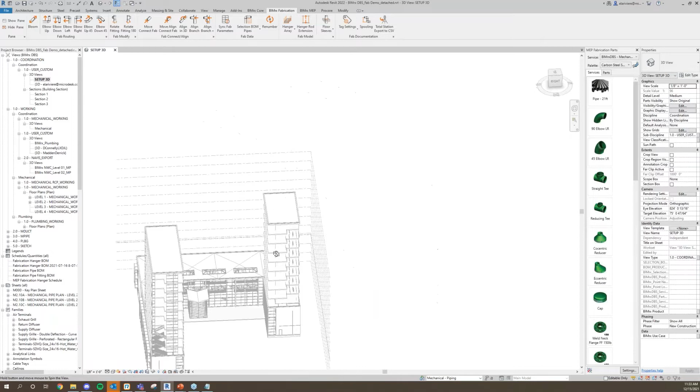All right. So my architect has just sent me a slightly updated model. That new model has come in, and I've got two whole towers sitting here that I didn't have before. I've already got some floor plans set up. I've got my first floor, 4 levels all good to go. But I really need to get my towers set up as well.

So BIMrx Core supplements this workflow pretty amazingly. I'm actually going to set up an entire set of views for this tower in about 3 minutes, something that is an insane amount of time to get done in.

So I'm going to jump up here and start first with the Scope Box Manager. Scope Box Manager is allowing us to not redo work. We're able to jump into the architect's model, find that they've already created tower scope boxes, and I can actually just bring those tower scope boxes directly into my project. So you'll see them sitting here both in green. I can click close, and we'll see those both show up. There it is, I can grab it.

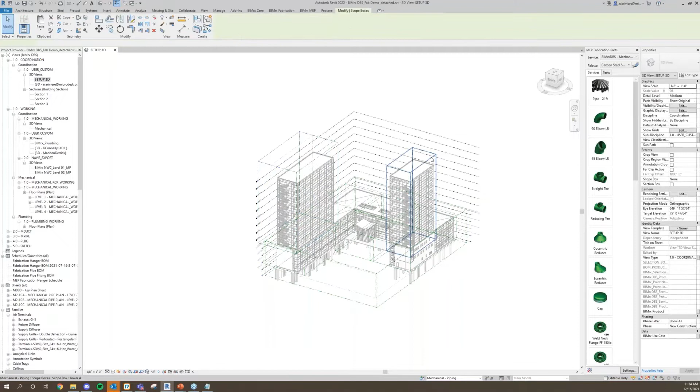Now, if something gets resized, maybe the architect has resized it, or maybe we've got an intern who accidentally dragged one of these things over, and we're not in alignment anymore. We're not up to date. We can jump straight back into that manager, and it actually remembers the link between these models. So if I tell it about the ARC model again, we'll see that these have moved. We are out of date.

We need to do something about these. So I can grab those two over on the right. I can update them, and we'll see that these move straight back to where they're supposed to be.

So once I've brought my scope boxes in, I really want to start getting my actual views set up. I'm going to do more than just views. We're going to do views and sheets. We're going to get this whole thing ready to go for an SD set.

So jumping in immediately, I'm going to go ahead and use the power of Excel to just make all this stuff move quickly. So I'm going to go in here and I'm going to load my configuration settings, something that I can generally take from project to project. I have those stashed in a folder over here. I'm going to go find my folder.

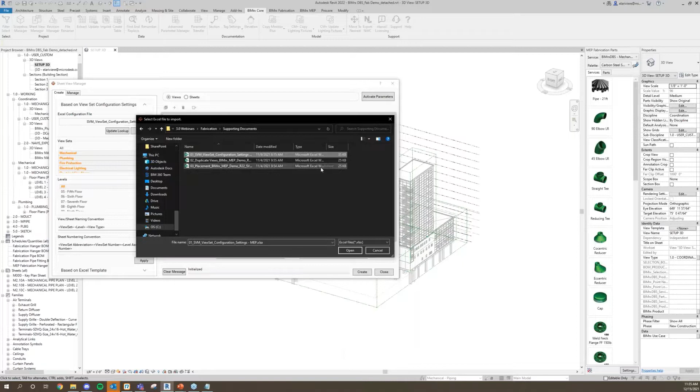I'm going to open up my standard configuration settings. That's going to load me in here. We'll see I'm doing mechanical, plumbing, and electrical power. I want to work on these files over here, 5th through 12th floors.

If I click apply, we'll see that this whole menu fills out, giving me abbreviations, view names, telling me what type of plan I'm going to be creating, calling out the levels they're associated with, templates we're going to be using, everything we need to set up that sheet.

So once I've filled this out for views, I can go ahead and click create, and we'll watch it generate 24 views in about 2 seconds. An incredibly fast amount of time to get those done.

I want you to think about doing this manually, right-clicking and duplicating and renaming, or going up to the View tab, going to Plan Views and creating each one individually. It's an incredibly time-consuming task.

Now, I created those views in 2 seconds. I can jump straight to Sheets and create an associated set of sheets in maybe 4 seconds, 5 seconds. Oh, not even 3. So very, very quick to create those original views and those original sheets.

But really, that's not all we want to do. We don't want to just create those views and sheets. We want to do more.

I've got 2 whole towers. Realistically, I want an A and a B view for each of those. I can jump straight in here, load in a duplicating view setting box, load that guy right in.

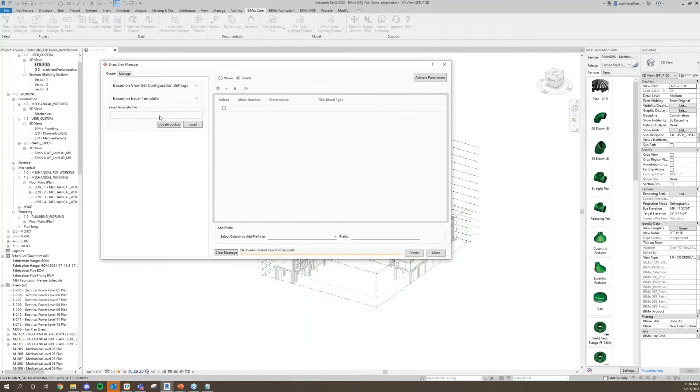I'm going to jump straight back from sheets to views here. And we'll see that I'm able to call out now that I'm using each of those 5th floor plans to generate a tower A and a tower B plan, and also linking each of those to my tower A and tower B scope boxes. So looking through here, I'm doing this for mechanical, plumbing, and electrical all at the same time.

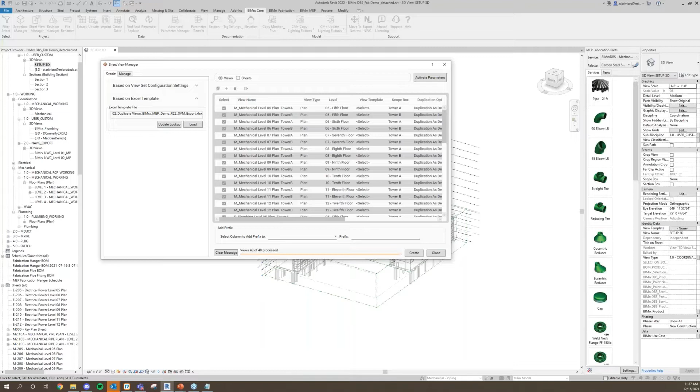I'm going to click create, and we're going to see 48 separate duplicate as dependent views created in about under 6 seconds. I'm going to close out of here just so we can take a look at these.

If we go take a look inside the HVAC folder here, floor plans, there we go. There it is, level 5 through 12, and if we open one of these up, we'll see that they're even being named Tower A and Tower B.

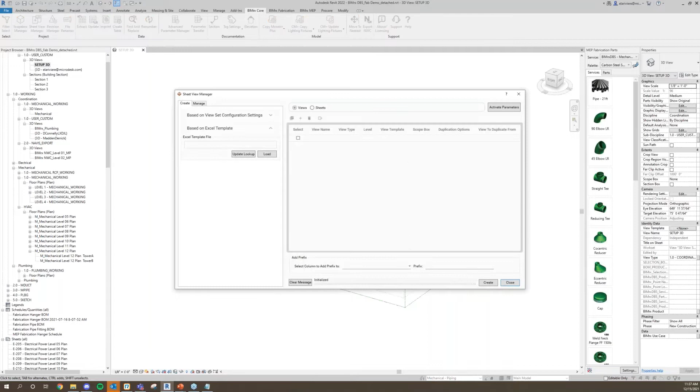An incredibly powerful workflow gets this project set up almost immediately. But wait, there's more. I can jump straight back in here and I can actually place these views on the sheets as well. I'm not just creating it, I am setting it up.

So I'm jumping in here, I'm going to load, and I'm going to grab that placement as well. Once that's been brought in here, we'll see that it's actually calling out each plan that we're working with, each view I want to use, and a location for each to be placed.

We're given these top right and middle right, so we should expect to see these on the upper right and middle right corner of each of those sheets.

I'm going to click create and keep talking while it does this. So if you look at the bottom, it is processing. This is maybe the most lengthy step in the entire process. It takes maybe a little bit under a minute to run.

But again, I'd like you to think of what the manual version of this exact same process would be. We're opening up each individual sheet. We are dragging and dropping a view from our project browser to each of those sheets. In fact, we're dragging and dropping 2 views.

Once we've dragged and dropped all the views and placed them, they're likely not even going to be in the same spot from sheet to sheet. It's really easy to make it look like multiple companies are making multiple different trades.

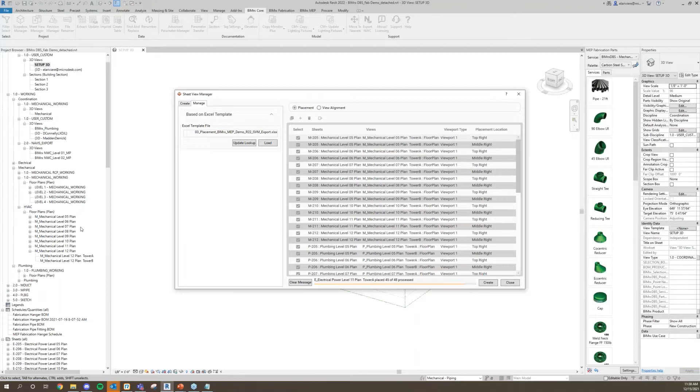Using a command or suite of features like this, we can make every single trade, every single sheet, every single level look the exact same and issue an incredibly, incredibly consistent set.

So if I close out of here, you may have noticed views showing up on each of those sheets as we went. I'm just going to pop open a mechanical level 10 plan, and let's take a look at what we actually got here.

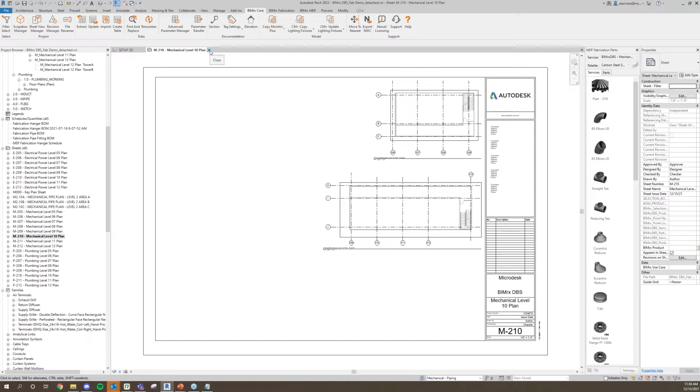Right, there's those 2 views, sandwiched to the right, all lined up. It's 11:39, and under 5 minutes, we have set up 12 floors of a project. That is crazy, crazy fast, right?

So very easy to do, works in giant projects, works in small projects, wherever you want to do. And we can reuse those files from project to project to make sure that we're not wasting time.

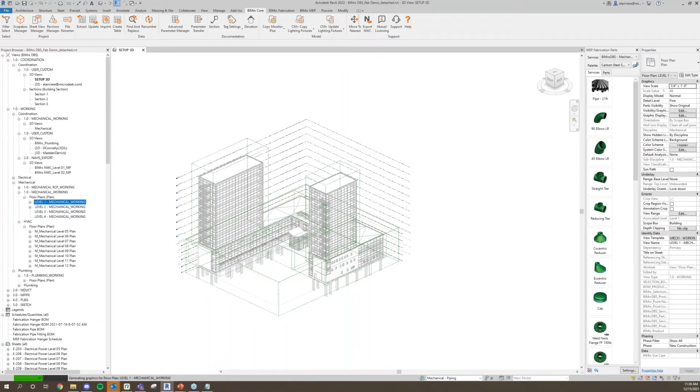So once we've got a project set up, we've got some space, some areas in here, we probably need to go and start filling out our model and actually doing some of that modeling. So I'm going to go ahead and jump into one of these mechanical working plans, and I'm going to do some stuff down here. I'm going to get rid of that setup view and start working.

The ability to work in 3D. In fact, I almost exclusively work in 3D at this point.

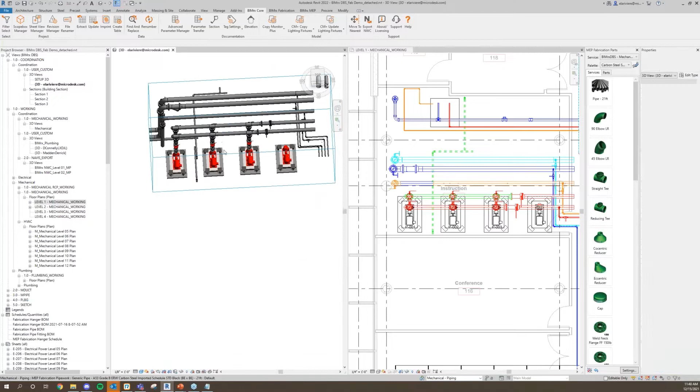So using that window tile to open these two things up, I'm going to go ahead and, I've got this pump sitting over here. It's already got a flange kicking off of it. And maybe I want to bring the rest of that header into this place. I want to get all this stuff copied over and connected.

Typically we're cutting a bunch of section views, moving a bunch of stuff around. Well, boo-hoo to all that. I want to work in 3D. I want to leverage the power of these tools to do this.

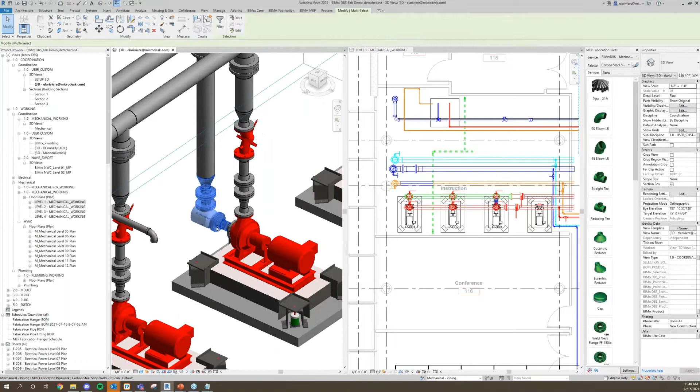Copying in 3D, probably not something you're used to doing because it doesn't tend to work. Nothing lines up, impossible to connect, impossible to get it all to move together.

Well, I can jump right up here and I can start using these move connect commands to start bringing these together. So if you take a look at this move connect fab, I can go ahead and grab that flange that's sitting over here, grab this element here, and we'll see it aligns, brings it over, and moves them together. If I hit tab through that piece of equipment, we'll notice these things are all connected together.

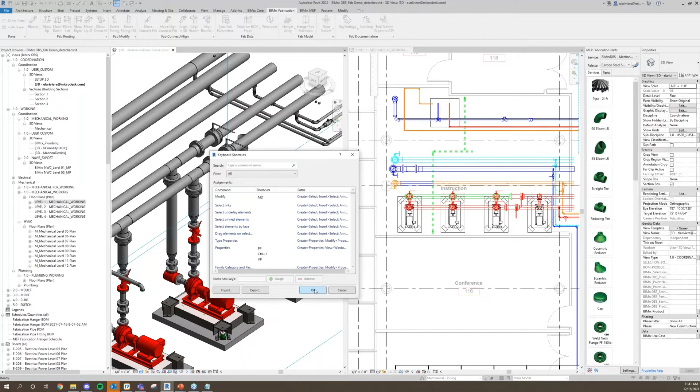A really, really cool thing we can do. You can actually go in and you can have your keyboard shortcuts loaded in here. So I can have fabrication keyboard shortcuts loaded specifically for every single one of the commands I have across the top. So we'll see elbow up is EE.

That move connect that I just did, I can go ahead and line up with an MC as well. Very, very quick to bring these together.

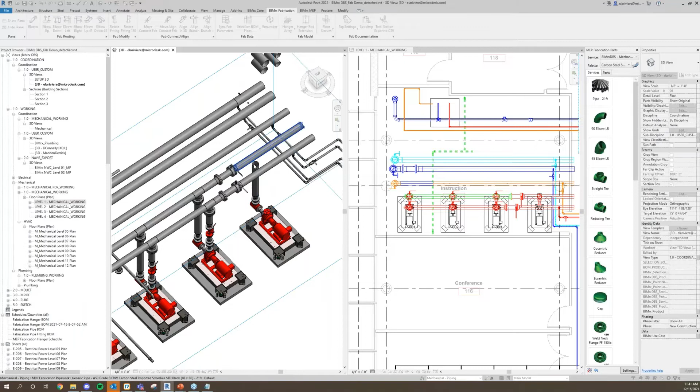Once I've connected those together, once those are lined up, I need to make sure my vertical is lined up for my header. I can use the align branch command to choose my header, choose my vertical, and it'll slightly move it to make sure these are a perfect connection.

So I can then use the trim extend command that's built into Revit to bring these two elements together. It's an incredibly fast process to start getting these elements connected. It works really, really well.

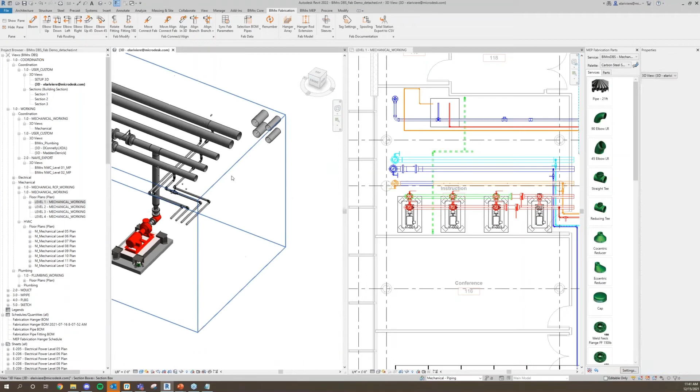Now, I might just not want to be connecting some stuff together. Maybe I want to actually build in 3D. Maybe I want to work with a whole bunch of these pipes that are sticking out of the corner. And if you take a look over here a little bit, we'll see another extra one there.

Now, connecting these is pretty easy if they're all on the same plane. I can use trim to corner to bring anything that's on the same level back together. Easy enough to connect these, easy enough to connect these.

These two here, linking up to that second tier, maybe not so easy. That's probably not going to work so well. In fact, I probably want to leave this middle one here open and maybe connect the other two instead. Give myself the correct amount of space to make these connections.

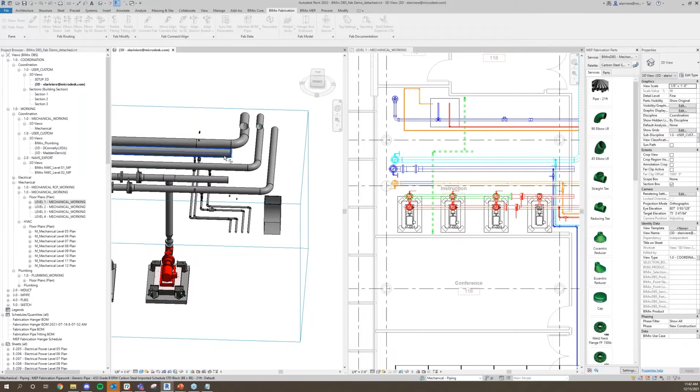So real quick again here. We're connecting across there. We're connecting across here. These two need to make it up to the second tier. Well, I can do some of this stuff incredibly, incredibly fast.

I can go ahead and use an elbow over. So maybe I'm using elbow right to drop down an elbow here. If I get the wrong direction, it's as simple as an undo and do an elbow left instead.

So once I drop those elbows down, I'm going to be able to delete those little extensions off the end of them. I'm going to grab those two extensions. We can remove that extension.

I can go ahead and look at both of these fittings, and I can use the rotate fitting command to select that fitting. I can bring this up 45 degrees. Again, if you hit the wrong direction, it's as simple as undoing, doing the same command again, and then doing it in a negative 45 degrees.

Run that on the same element over here, rotate fitting, thus in negative 45 degrees. I'm going to go ahead and bloom both of these elements out and give myself an extension.

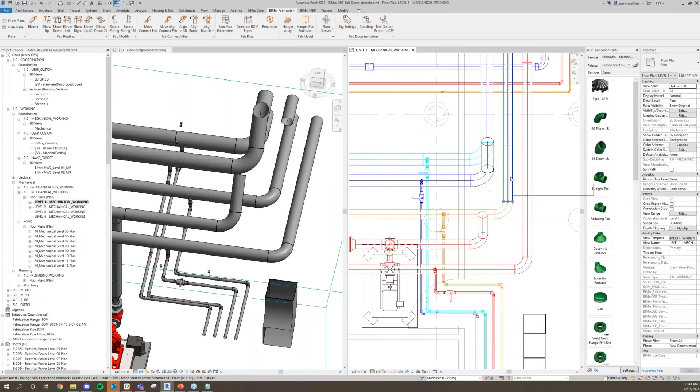I can start mixing 2D and 3D workflows together at this point. We take a look down here, I see that little extension up and I see the horizontal over here. I can use my align command over here to bring these together. Use my align command over here to bring these together.

Now that I know these items are lined up, we want to start bringing them together and actually getting these things to connect, right? Well, I can use my elbow down at a 45 off of these two items over here. My mistake, wrong keyboard shortcuts. Drop those elbow 45s down over here, delete that little extension right here, and then we can use a move connect to make this extension line up and connect to that elbow.

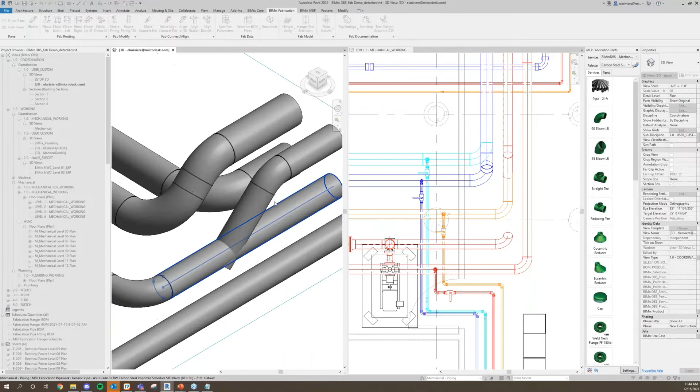So that same move connect fab, grabbing the elbow right here, grabbing that extension, and we'll see it move over, connect, and line up all together. Very easy, tab through, see everything's connected. That same move connect fab, elbow. Make sure you are clicking very intentionally. Maybe zoom in to make sure you're getting the element you want, and we'll see all those elements connect together nice and easy.

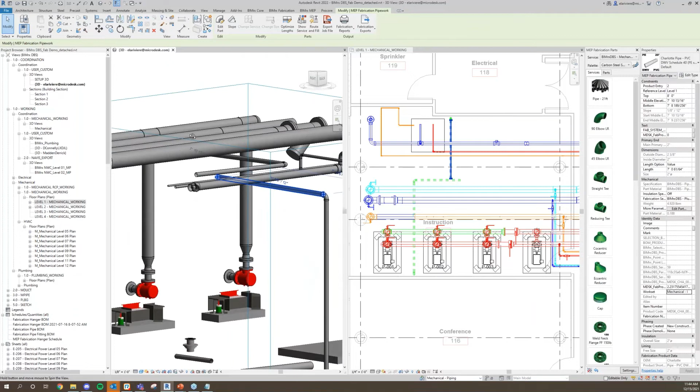Now, this doesn't only work on flat pipe, this also works on slope pipe. So jumping over here really quickly, let's take a look at a piece of slope pipe. If we see over here, we'll notice that there's a little piece of pipe coming up this way and kind of just lining up to go in. Now, those are not lined up to go flat, and I'm going to even show you an extra cool thing. What if I even had maybe a little run that's sitting here, and that last bit of the run doesn't even have a slope on the end of it? Well, we're going to take a look at two different situations, a no slope and a slope, and trying to get these to connect. Both of these are horrible situations to be in. Nothing ever wants to connect easily.

Well, we have these align branch commands to make all this just simple as heck. If I use this first align branch command on the main right here and the branch connecting to it, we'll see it shifts it up. It has maintained that slope. The slope is not changed over here. And I can use that trim extend to bring these items together. Not a single transition, not a single extra item being brought in.

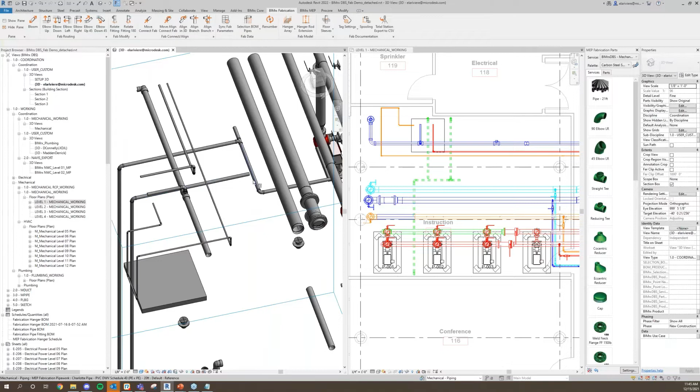Now, what if I have something that doesn't have a slope but is supposed to? Well, we actually have a fix for that. We have align branch plus. So choose your main, choose your item sloping into it, and it's going to go ahead and pass that slope directly into that element. So when I do that trim extend to bring these together, that will go ahead and connect here as well. Incredibly fast to work with that slope pipe. Very easy to work with that flat pipe. Elbows up and elbows down anytime you need them.

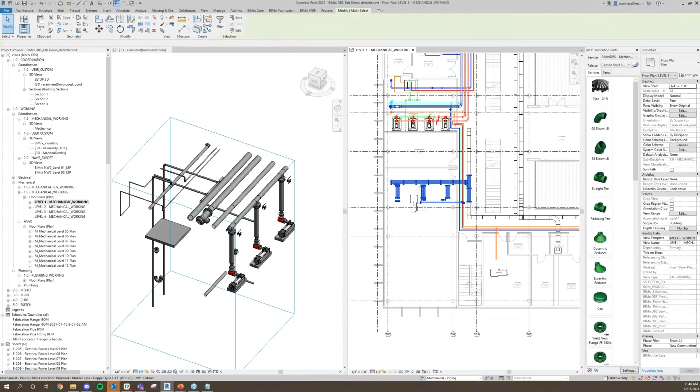Now, this stuff doesn't only work with pipework, it also works with ductwork. Let's take a real quick look at these elements down here. If I go ahead and open these up in 3D, we'll see that I have some ductwork floating around at different heights. I have some terminals that need to connect. It's just not really set up yet. Now I can use those align branch commands just like I was doing before to make sure that these are lining up at the correct height to make these connections. So again, using that align branch over here, we can line these items up. We can use those trim extends to bring these items together.

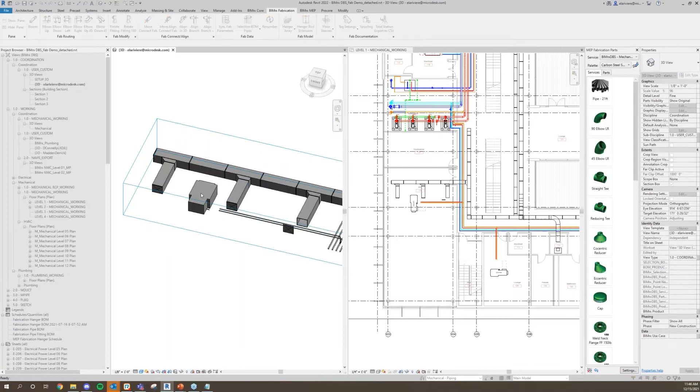And then if I want to use move connect to start connecting those air terminals, I can do that as well. So using that move connect over here, choosing that end piece, choosing the cap. Very quick to start placing these items together in 3D. So we've done some modeling. We've seen it on pipes. We've seen it on ductwork. Once we've done some of that modeling, it's really time to step into the second level, and that's getting some detailing in here. Now, what kind of detailing are we talking about? Well, we can very quickly add some sleeves in, whether it's wall or floor.

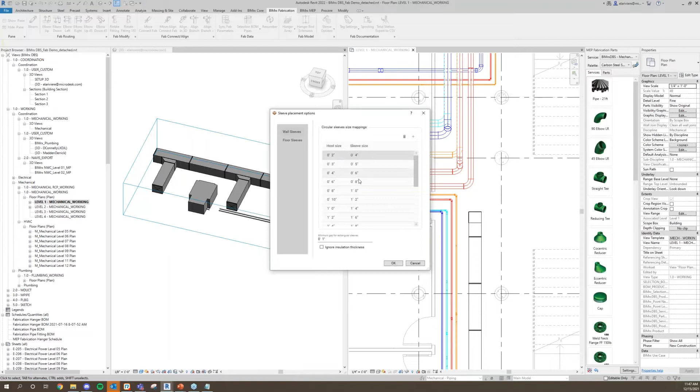And not only can we add them in, we can set up some options so that sleeves match whatever your shop typically works with. We'll notice we have host size and sleeve size, auto-generating that sleeve size based on the elements you select. Those sleeves, as we look at them, will compare against our linked-in background to come up with the correct size. So if I go ahead and I do a wall sleeve across those pipes we are already working with, and I click finish, we'll see that it's going to automatically generate a sleeve the width of that wall for each of these elements.

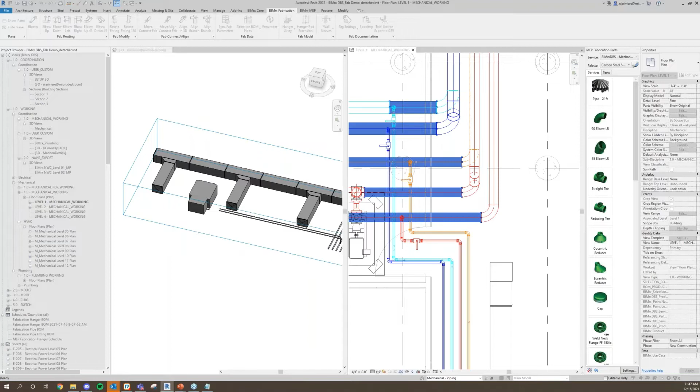Now, an extra cool thing about those sleeves, these come with nested points inside of them. We'll see in a little bit that there's an entire set of point workflows we can do that export out to total station with no problem. We'll get a little bit more into that when we take a look at the hangers. So these sleeves are being generated. We see them placed across all of them. There they are. If we want to go take a look in 3D, there are those sleeves in 3D for each of those elements. Very, very quick to place, works on walls, works on floors.

Now, there's a little bit more detailing we need to do than just placing sleeves. We probably got to work with hangers as well. So let's take a look at how we can maybe make hangers a bit easier to work with. So for our hanger commands, we actually have the ability to set up a configuration. So that configuration says based on size, based on service, what hangers do we want to use? We'll notice for ductwork, I'm saying in any size, I don't care, I want to use trapezes, and then I've got a few settings for my spacing.

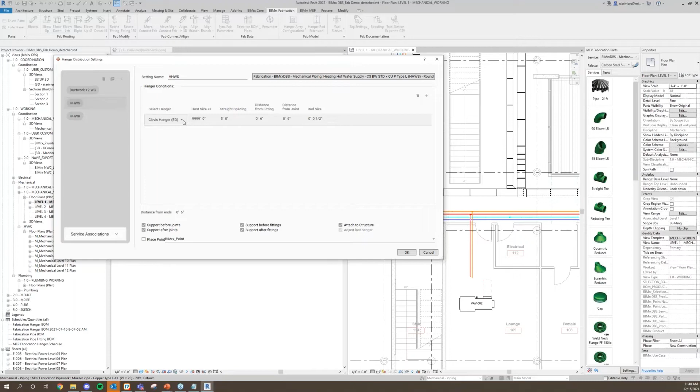I've also specified for hot water supply and hot water return, I want to use clevis hangers. If we want to add more, you can absolutely add more rows. Use the host size to determine what size gets what hanger. These hangers we see are all the fabrication hangers that we would have coming from your services. So once I've gone through and specified what I want these to be, I can use that array command, and I can just select elements and it will place them on those elements. So here I am, select a group of elements, click finish.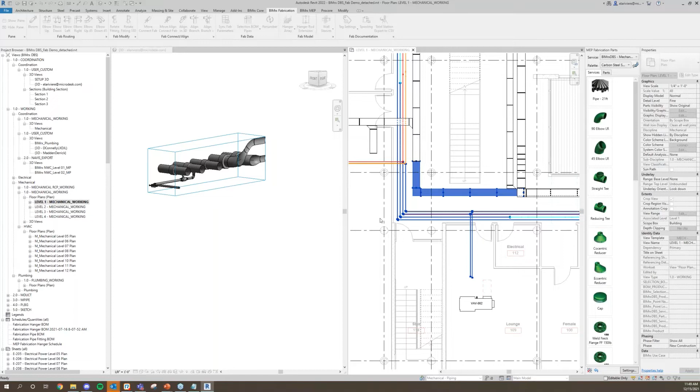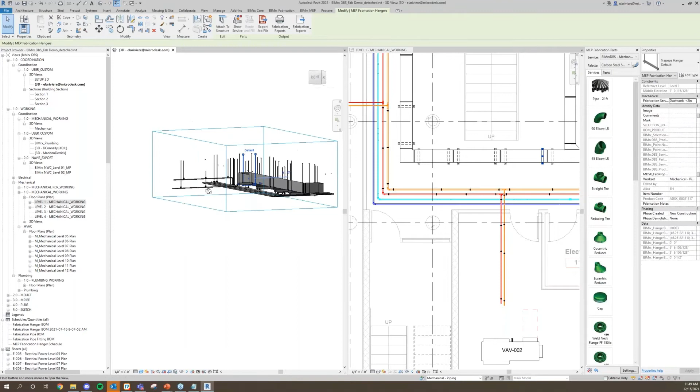You'll notice it's not going to place it on the cold water, so I have not specified a configuration for the cold water, but it's going to go ahead and place them on everything else. So there's those hangers sitting on the pipe, there's those hangers sitting on the ductwork. Let's go ahead and take a look at some of these elements in 3D. Now, there are a couple settings that I chose inside that hanger configuration. I asked it to please extend each hanger until it hits a piece of structure. So if I very quickly toggle on my architectural model, we'll notice that these have extended up right to the point where they intersect with a piece of architecture.

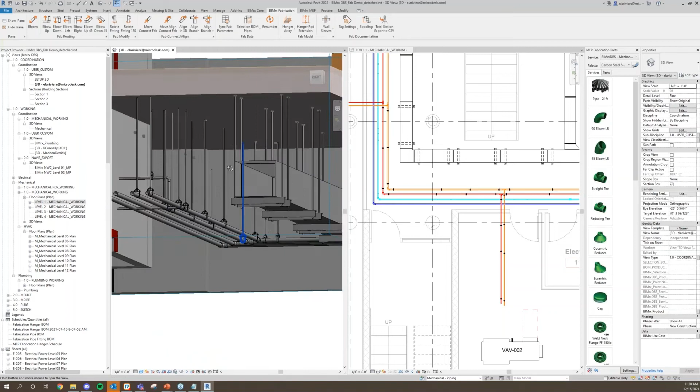I'd also like you to notice that I set the hangers to automatically place points at that endpoint there, right? That's a setting we have in the configuration file. So it's actually dropped those points at the exact endpoint of each of those hangers. I have that setting turned off for pipework. You'll notice over here I did not place those points for pipework. The reason currently being, those points, once they're placed, that's where they'll be. If your hanger moves, you'll need to delete the points and then use the command hanger points placement to get them back. The recommended workflow right now is to place your hangers and get them located.

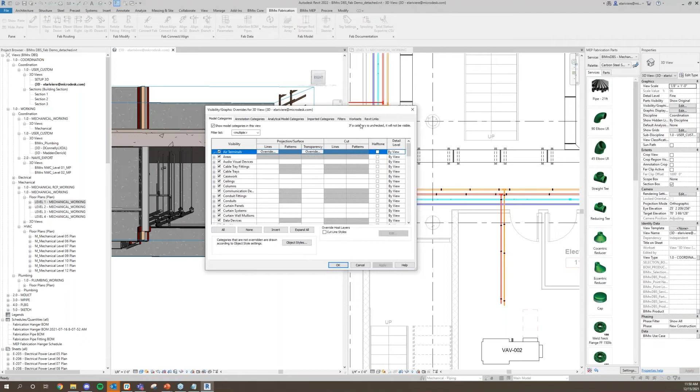Once you're happy with where they sit, you can then go back afterwards and place those points because it is incredibly quick to place those points. All I need to do is say, hey, here's some hangers without points. Let me use my hanger points placement. Select those elements, click finish, and it will generate those points for me.

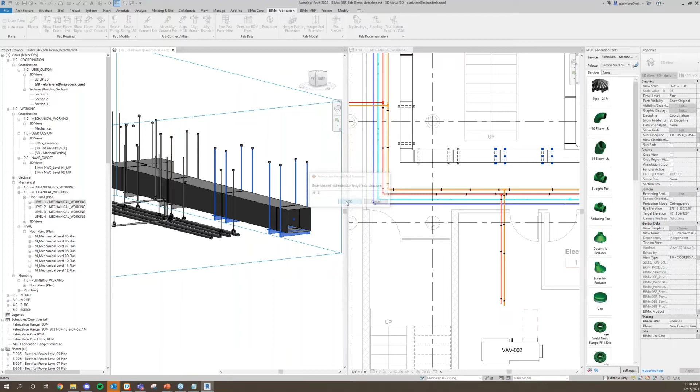We also have the ability to do a hanger rod extension. That extension will allow us to kick some of these hangers a little bit further into the steel so we can own that extra space. So maybe I want these to go 2 inches further into the steel. I can do that immediately. Just to note, the points will remain exactly where they were. The points will not move.

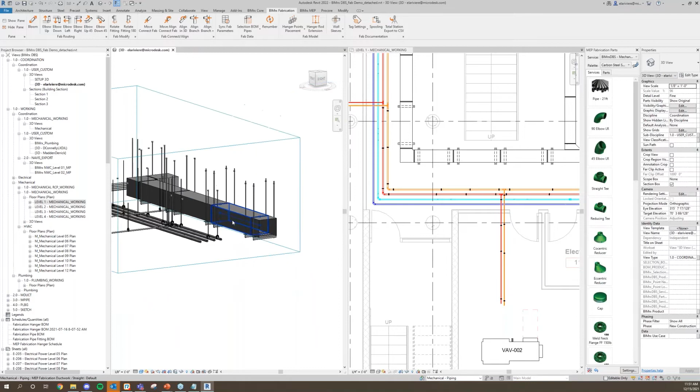Recommend placing your points down so they're on the outside of the structure, then extending into it, so when you go ahead and use your laser in the field, it's hitting the correct spot. So placing those hanger points, very easy. Placing those hangers themselves, very easy. So we've gone through, we've done some of that extra level of information there. We've got those hangers placed.

Maybe I want to export those out to total station. All I need to do is choose the total station export, select some points, and it will just export that out directly to my desktop. I'm going to save it right there. If I want to go grab those files from my desktop, we will see that total station export, and it's going to give me locations of each of those items that I just selected.

There we go, point numbers being called out and giving us a little bit of information about what that element is, right? Those hangers telling us exactly what style hanger it was. Very, very quick to export those out, and that will go straight into a total station service.

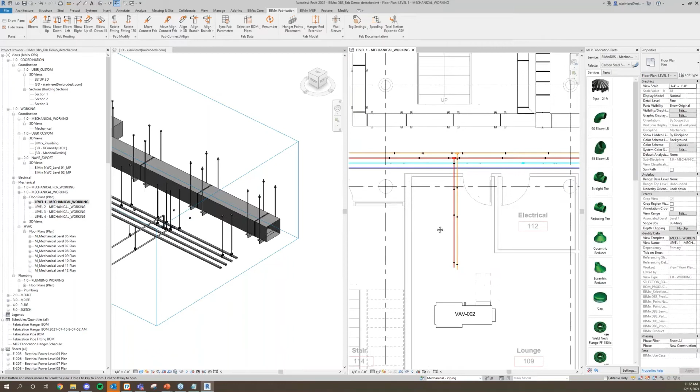Now, a really quick thing I'd like to show you that is also happening in the background, we do have access to some additional data you wouldn't normally get access to. I'm going to open up the show pane over here. Anytime we click a piece of fabrication equipment, we're actually getting those additional parameters we're not supposed to see showing up in our fabrication properties. And any of these properties that we see over here, we can actually link up to a standard Revit property by using the BIMrx Fabrication Database Sync. We'll see that right here, that sync fab parameters.

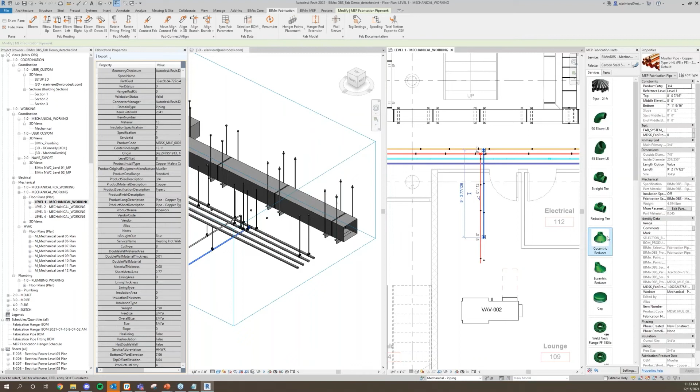We'll notice right now, I am calling out for the weight of each element I am working with. This is going to assist me in doing my point loads. I've pulled that up. It's a value that I can access in Revit, not just something I have to dig into the properties for. And we'll notice if I change the size of this element, and I'll click back on it, we will see that the weight may not have updated, but if I go and I reopen my sync fab parameters, all you need to do is open that up and it's going to go through and update any of those values for us. Right? Very, very quick to get those values in.

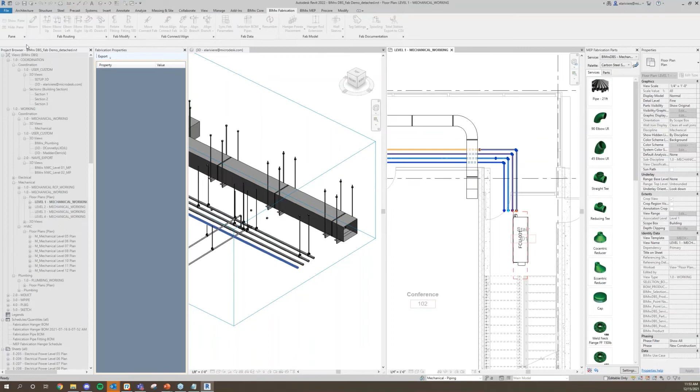Then the last thing I'd like to show you very quickly, maybe you've got someone on the field who is bugging you to start working in a certain area and you need to get them a really quick bill of materials. Well, I can go ahead and pop open a really quick bill of materials. If I want to do one for pipe, just get a small selection of elements you care about, click finish, and it's going to automatically generate those schedules for pipe and for pipe fittings.

Those will be dated and timed. Those are both sitting down here in my schedules. There's the one that I just created here on the 15th, and there is that pipe bill of materials coming out, giving me all that information. Very, very quick to get that extra data, very, very quick to give it to other people.

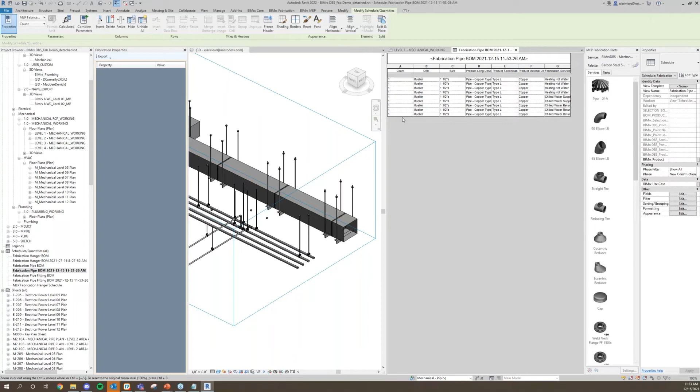Now, the last real step we have in detailing is generating some sort of a spool. So I'm going to jump back to my level 1 views here, and let's do this last spool step. So I'm going to go move over. I'm going to take a look at this area over here, and I'm going to spool the second header that I have sitting over here.

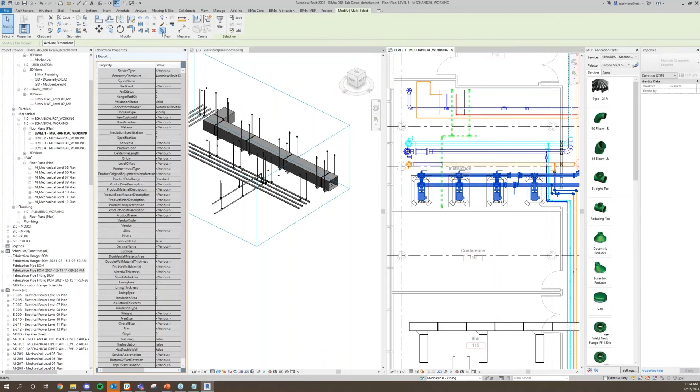So if I grab these elements as they sit, open those up in a 3D view, I'm going to get my 3D view just a little bit more pointed, so I'm only looking at the elements that I care about. I don't want to select anything that I don't intend to select, and this is a busy area. So I've cut it in. There's only the elements I care about selecting showing on screen. I can open up my Spool Manager.

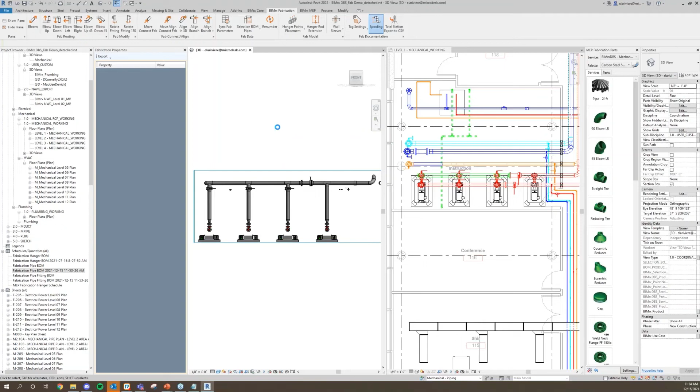The Spool Manager does a little bit more than just generate these spools. It makes it easier to figure out the spools that have already been created as well, and it'll automatically name those spools. So I'm going to go ahead and choose some elements across the top that I want to spool. I'm pretty happy with my selection right here. I can use the Get Current Selection command to create that assembly within the Spool Manager.

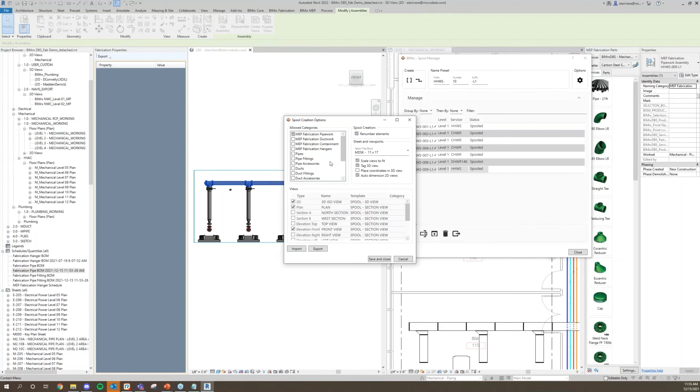Once I choose it, I can generate views with the Generate Views button. I've already gone through and done a whole bunch of options for those views I'm about to set. We'll see those briefly when I look in options up here. I've applied view templates. I've chosen the views I want. I'm tagging 3D views. I'm automatically dimensioning in 2D. Ooh, that's pretty big.

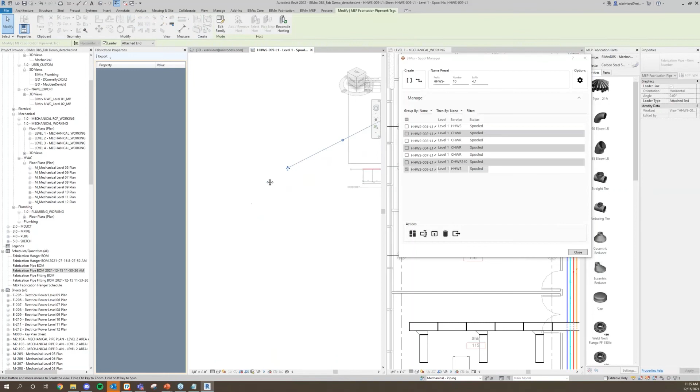I've chosen some options. I've generated my spool, and now I want to look at it. Well, I can jump straight by using the Open Checked option. And there is that spool. It's gone through, it's dimensioned, it's bubbled, and yeah, you may wind up with a bubble that's a little bit outside of the area you want, but that's a small price to pay for guaranteeing that every single element that shows up in that 3D view has been tagged.

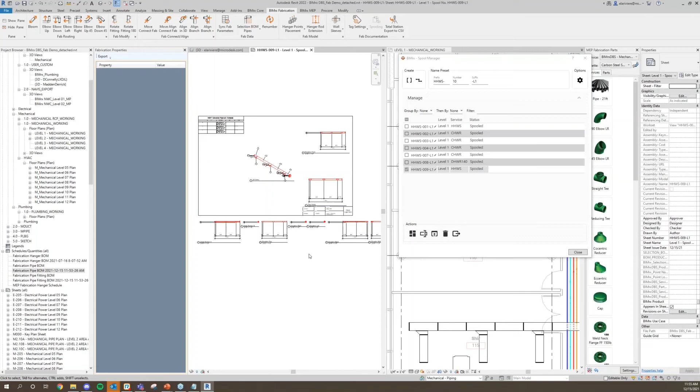You'll notice I am also tagging my welds. If you didn't want to tag a weld, it's as simple as turning it off inside your view template. We'll notice all that automatic dimensioning showing up here as well, really just giving us a spool sheet almost immediately, really fast, really nice. So spooling is now a breeze. We've created a bunch of stuff. We created some sheets, we created some spools. It's time to circle back to Core and really get to that final printing workflow.

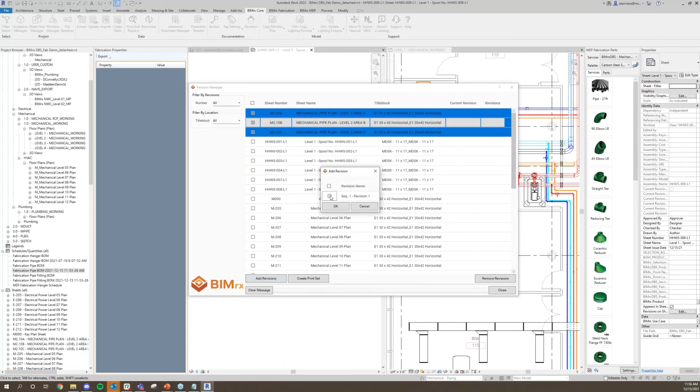So if we get back to Core and we take a look, we have the Revision Manager. Revision Manager is allowing me to jump in and view every sheet that's in the project and even select a few of them. And I could even just push a revision to those elements right here. So all of these are now on revision 1. In fact, I could then filter and only see the elements I've tagged as revision 1. And I could even create a print set out of these elements, and I could call this low rev 1 print set.

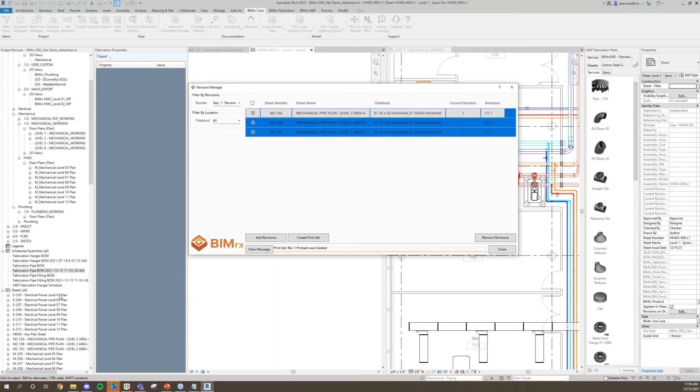What's extra cool about that print set is I can now just tell some other intern or some other person to jump in here, go ahead and queue up that print set and kick it out. But there is a little bit more as well, and I'm going to jump back to the PowerPoint here. We actually have the ability to start linking that print set to BIMrx Cloud Manager. So one of the amazing additions to BIMrx is the integration of Core and Cloud Manager.

Cloud Manager already allows for the export of PDFs and NWC files from the Revit model on daily, weekly, and monthly bases. So we just saw how to create those print sets; now we can use Cloud Manager Pro to take that print set and automate the export of PDFs on demand or on a schedule. This integration is really opening up possibilities for even more ways to automate your workflows.

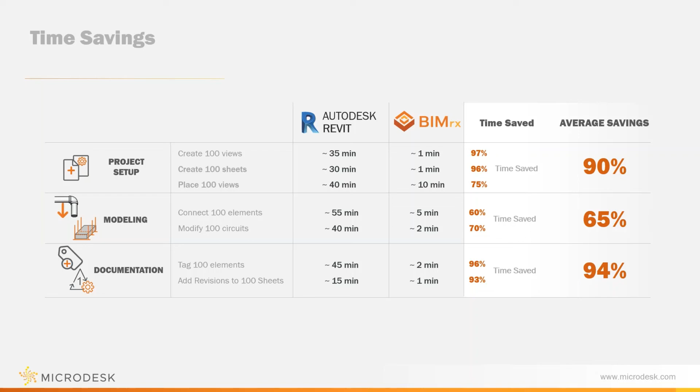Now, I'd just like to point out a few time savings. Really, the more elements you need to modify, the more time you're saving with BIMrx. The real question is, how much time are you wasting by not having BIMrx? We're really seeing about 90% time saved in project setup, about 65% on modeling, and another 94% or so on documentation. And we just saw a large portion of these commands, but there's still more that we didn't actually get a chance to go to, and there's a whole bunch in Core that we didn't get to see at all.